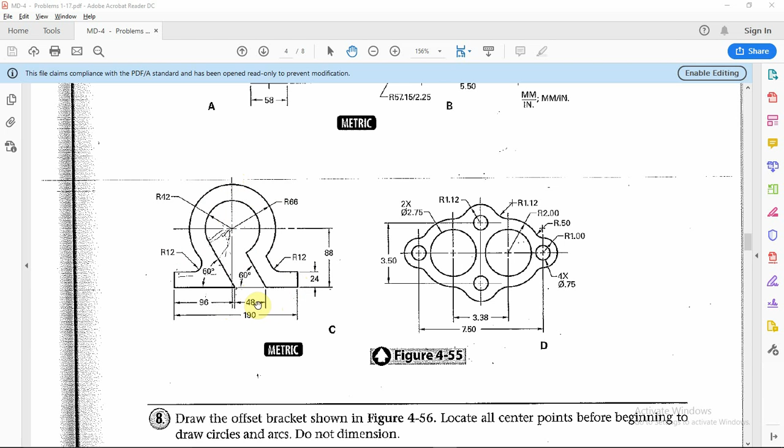So again, pay particular attention to this, and this video hopefully will shed a little bit of light if you are having some problems. Definitely some presumptions made.

This is a good example where geometric construction is what is used to accomplish this drawing. Question is which route you have to go.

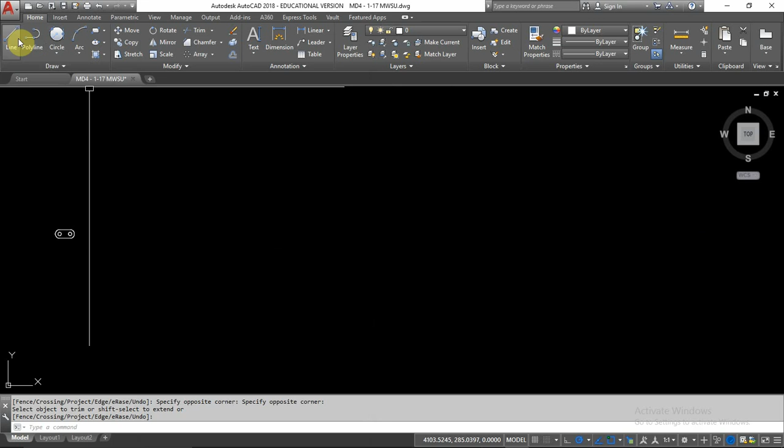Now I'm going to go ahead and start. I'm going to draw that bottom line, 190 millimeters long. This is metric, so 190. Okay, now that is the bottom.

Now I do know it's going to break somewhere here to the right of center, but I'm not going to worry about that point right now.

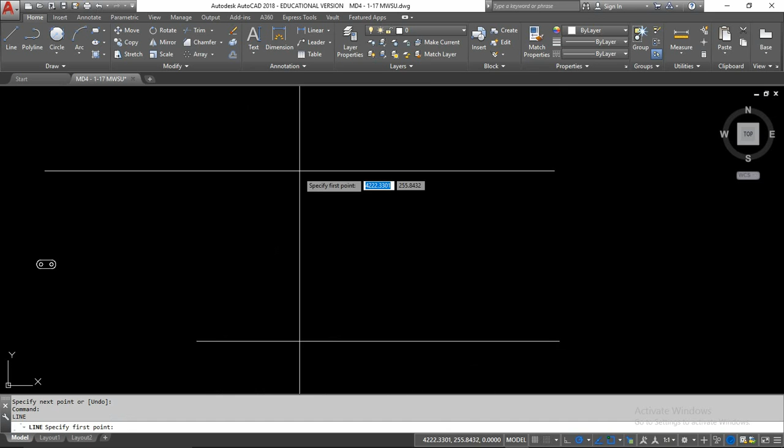Now another thing I do know is that it is 24 millimeters tall in this case, up and down the height, or it's not really the overall object, it's the fact that this part here is 24 millimeters thick. So 24. This one comes over, that appears to be a rectangular base, and to there.

Okay, so this is the base. Again, this is going to be modified, this line here definitely. This one will be also. But at this time, what do I know is true?

How do I get this big circle up here, either the outer one or inner one? I'm not going to draw it yet because I may accidentally think it's where it belongs, and then that'll mess me up. Think of it as a path.

I started with this corner right here, and so I'm going to use dimensions that relate to it, or to there. Besides the 190, there is also a 96. So in that case, I'm going to draw me another line.

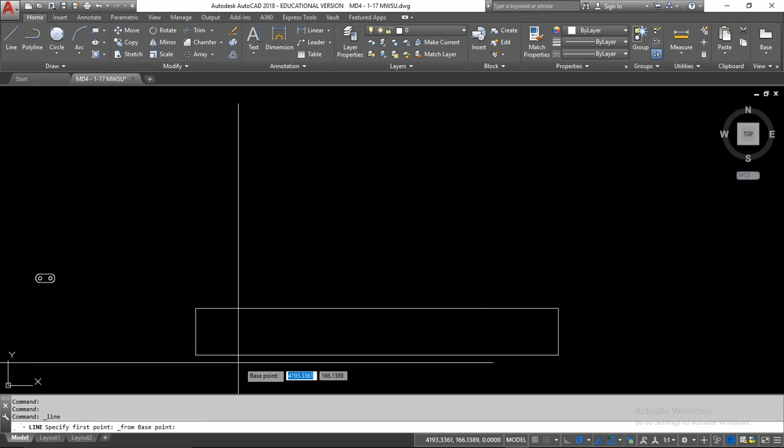Now I'll use the shift right-click from this endpoint, and it is a distance of 96 horizontally to the right to this point. Now there is not a line there. This is now the start of my line, and this line is going to come up this way.

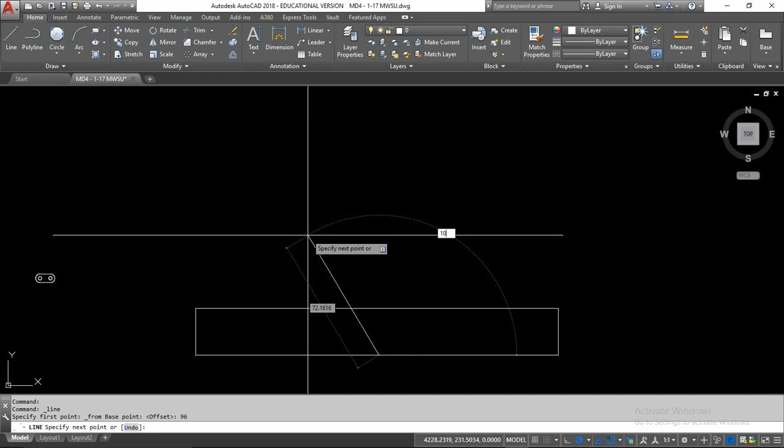What else do I know is true? Well, I know that it is 60 degrees from this horizontal on the left, above the left horizontal, 60 degrees. Well, per what I'm provided, I see that it is 120 being the supplement to it, supplementary angle.

Okay, now the length I just drew randomly. It might come up farther, I don't know. But at this time, that is all I need.

Also, from this point, there is another line, which is also 60 degrees, so it is parallel to this line. So I'm just going to copy it over a distance of 48.

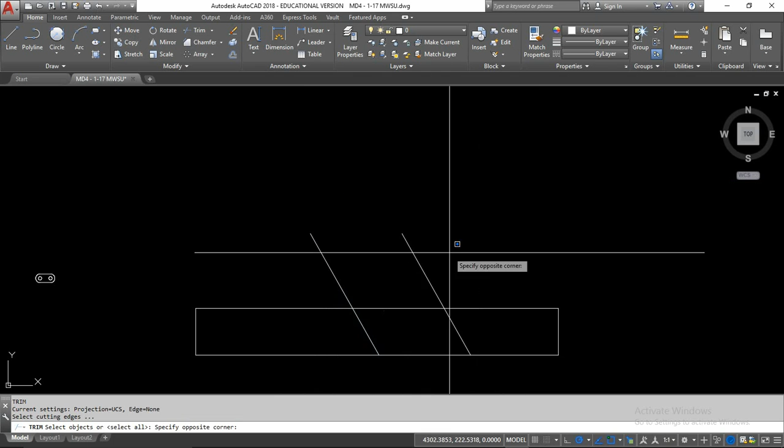Okay, now starting to take shape a little bit. If you want, and honestly I kind of recommend doing this, I'm going to go ahead and trim. Using those as my trimming objects, I'm going to trim both of those lines. Now this line won't go all the way over here, nor will this line come all the way, but I'll leave those for now. What else do I know is true next?

Now these lines, this one here is going to come up, and it's going to end up being tangent to a circle that is in here.

How do I get that? Well, let me go ahead and just draw a circle. I'll just draw it out here, and the radius of that one is 42.

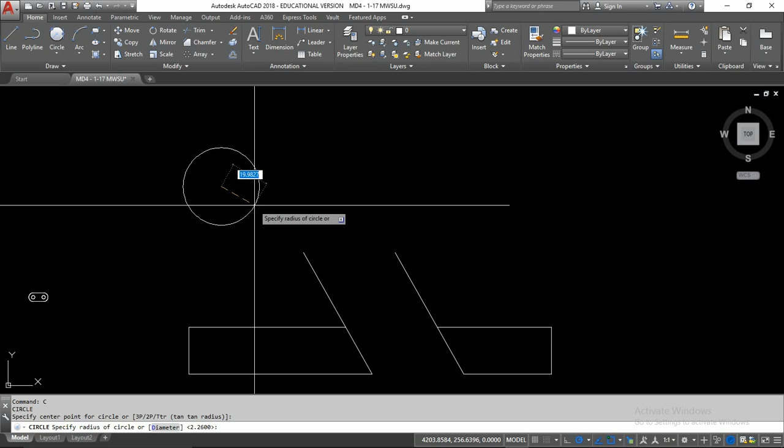I'm not going to draw that second one. This is the inner circle only. So I do know that somehow or another this circle is tangent to that line.

Another thing I know is that the center point is a distance of 88 up from this line. So in that case, I'm going to go ahead and draw from here up 88. This is a construction line. I'll end up deleting it.

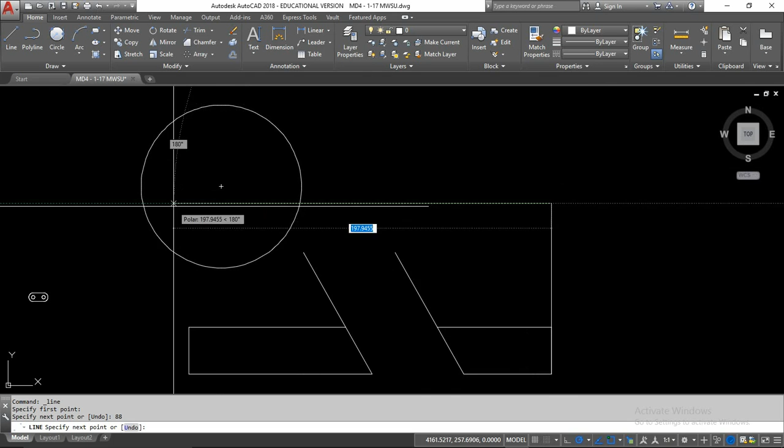And I'll draw over. Let's see, I'll just make sure it's right, so that way it stays symmetrical. I'll draw it that long. And this one I'm going to change color to say, hey, that is a center line.

And I'm going to put this circle on that line. Now, again, where is it? Well, there is only one other place, well, two other places. It could be here to where it's tangent. This line is tangent over here. That's not the case. So I know it needs to be over here somewhere where this line is tangent to there.

Now, you notice I clicked on the midpoint. I'm not absolutely certain that that is correct. It might be. It might look really close. If that's the case, I could do an EX, extend to here, and click.

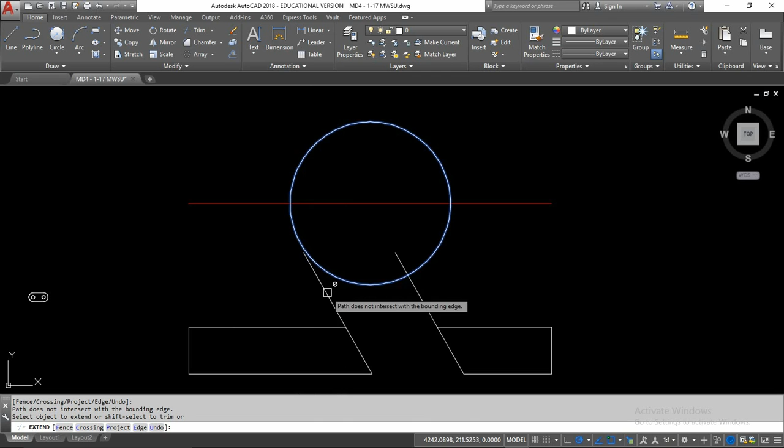Well, you notice it's saying no, can't do that. The reason for that is I said this is what I'm extending to. If this line is going to miss it to the left, then it's going to say, hey, this isn't going to work. Keep in mind, again, your drawing area, your graphics window is infinite in size.

You don't want this to extend infinitely. Your computer will be frozen up forever until it gets there. So that tells me that this is off a little bit.

Now I'm going to double click. I'm going to double check radius 42, and that is what it needs to be. So what's going on here?

What I'm going to do, I'm going to move this back again so that we don't make an assumption that we don't want to make. Actually, I'll go ahead and draw it up here also.

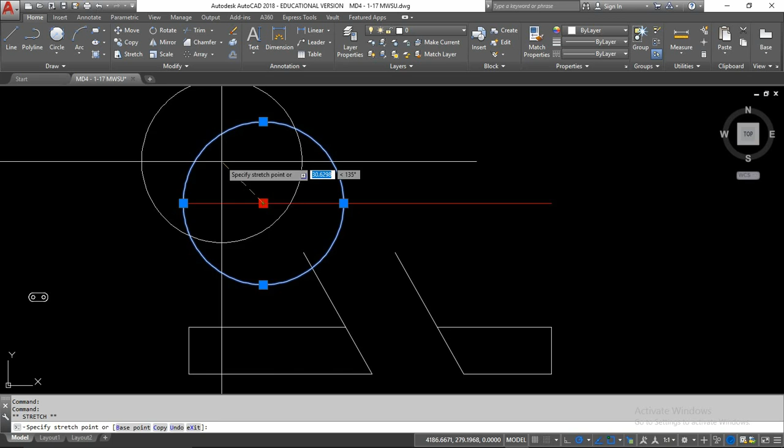So here is where knowledge about tangents can come into play and can be very beneficial. The fact that I know this circle needs to be tangent to that line there on the left. And when it is, I know that, now I'm just going to pick somewhere, and this is, I'm going to show that it's off.

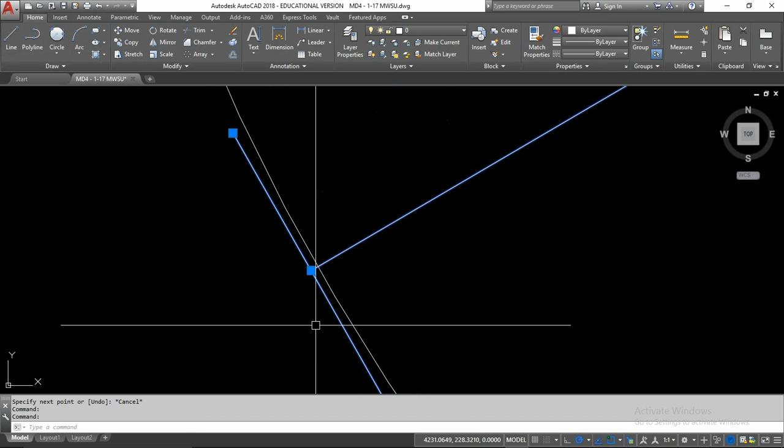I'm going to pretend that it's tangent there on the endpoint. If this is truly tangent, one thing I know is true is that the radius drawn to that point of tangency will be perpendicular to this line. Okay, so, and notice again, I'm just throwing that out there nice and quick. It's not accurate. I'm not intending for it to be.

Let me move those back. I did undo, Control Z. So what I'm going to do is, if I know this line that is perpendicular, the radius is perpendicular to it. If this is 60 degrees up from the left horizontal, a line perpendicular to it, well, here we go.

A line perpendicular at a distance, well, I'm not even going to do a distance. I'll just draw a large line, shift right click, perpendicular. Notice where it's going to select, right there.

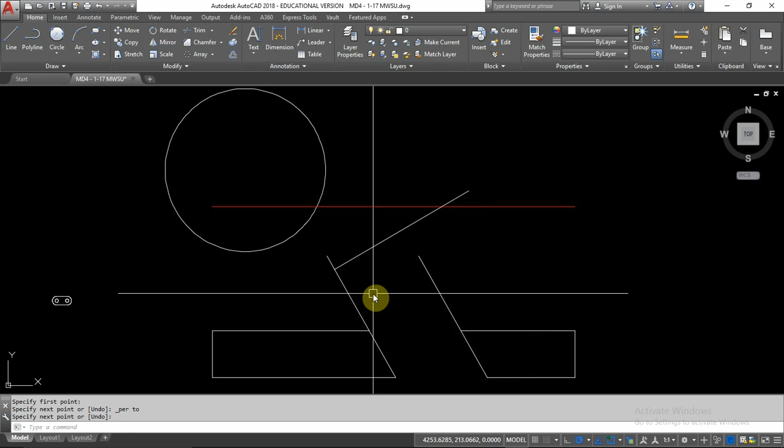Now I can draw, let me move this first so you're following along, which I don't know that the tangent point is at that endpoint. I have no clue. So I'm just going to draw a circle from here, that intersection, a radius of, drawing that radius backwards, 42.

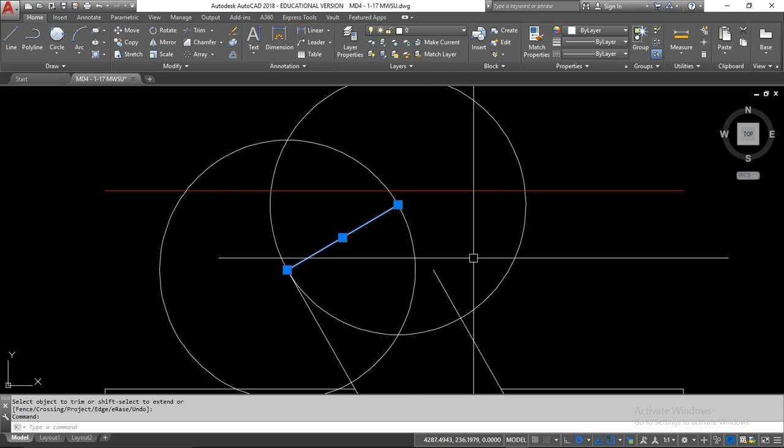This theoretically is where that line, that circle, needs to be centered. So if I move it from here to there, I now know, since this is the radius. Let me make sure you understand what's going on here. I've selected both the circle and that line, and they are exactly the same point.

Now here's where that line appears to be off. Okay, so I do know that this circle is now tangent to that line. This line, the radius, and that circle were construction lines in order to get to it, geometric construction. Now, the one problem is this is now off of my height.

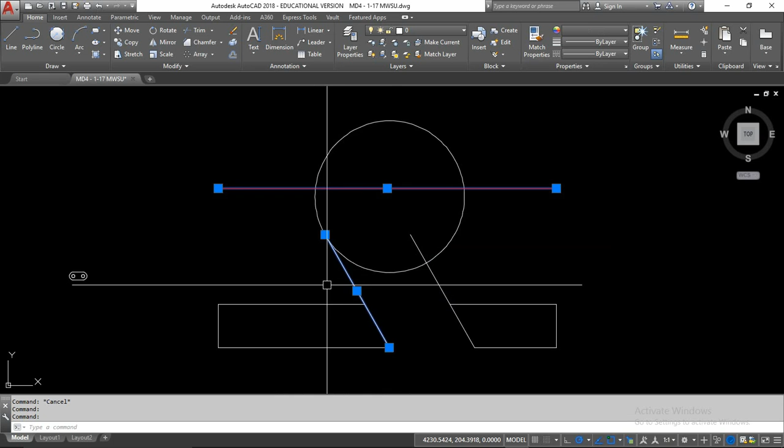This line here is where the center of this circle should be. So basically it just needs to move up. It needs to stretch upward at this same 60-degree angle up from the left horizontal until it intersects this line. So I'm going to draw a line from the center, and I'll just draw it here, tab 120, the supplement of 60.

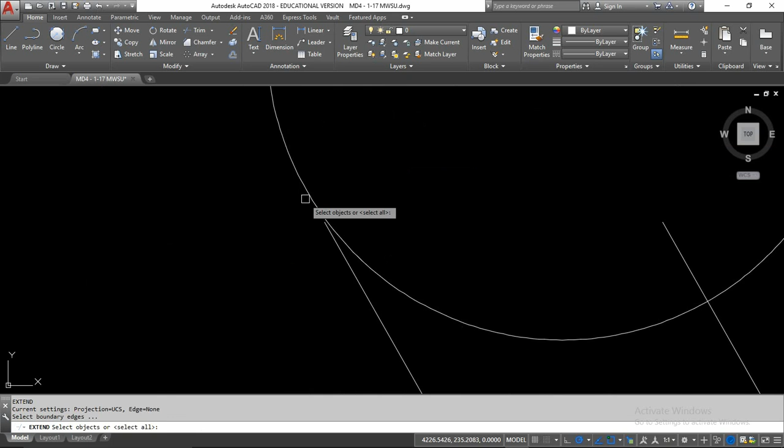Now I'm going to move this circle from that center to that center. Let me erase this. I can see that this line no longer intersects here, but if I extend to this circle, there it is. Now, I can go ahead and trim this, but just to double check, let's get rid of this line. Okay, and let's draw a line, shift right click from tangent, from here down to this point.

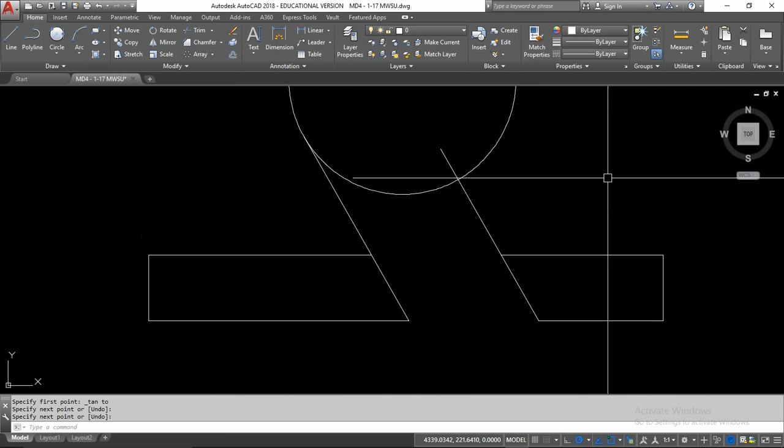Now double check it. If I want to measure angle line to line, it shows that it is 60 degrees. Now I haven't gotten into being able to show this more accurately as far as exact 60 degrees. This is rounded, by the way, but at this time, trust me, I do know that that is a perfect 60 degrees. So at this time, this circle is correct.

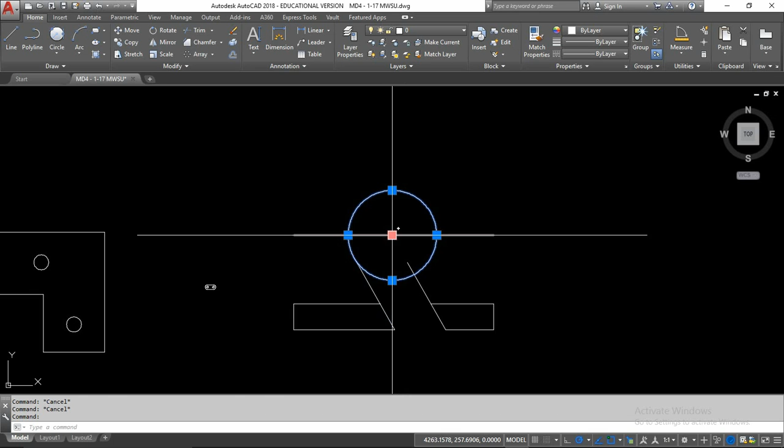It is tangent to this line being 60, starting from this point, 96 units over, and the height, the location of this circle is on that red line, a height of 88 millimeters up from this line here. So at this time, we are good.

Now, what do I know is next? I know there is another circle that is the same center as this one, and a radius of 66 units. I could have done the math. 66 minus 42 is 24, and I could have done an offset.

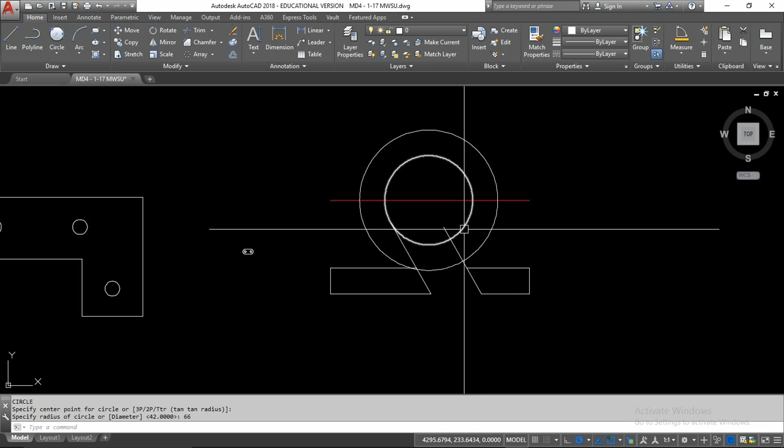By the way, these two lines, or the length of this line, is 24. There is that uniform thickness all the way across that I was talking about. Let's go ahead and clean it up a little bit. Let's trim. Okay, let's also trim this.

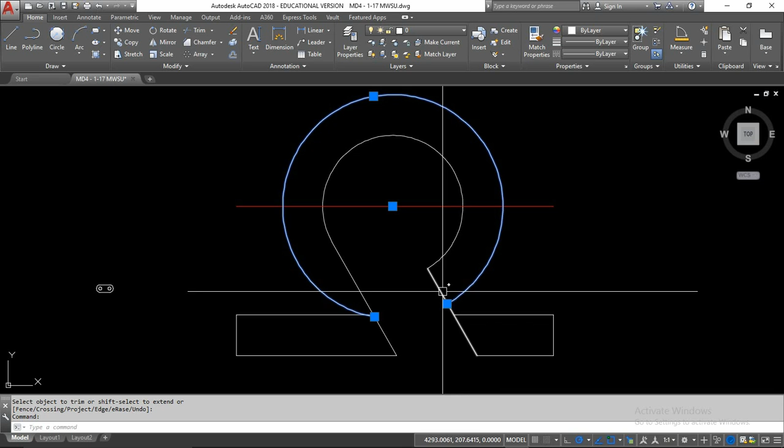Now again, this arc here won't come all the way to the line. This line here and this line here will not come all the way to this line. Let's go ahead and do what? Well, I said a uniform thickness. Here is that 24. What I haven't done is a uniform thickness of this angular piece here and this angular piece here. So let's do that via an offset.

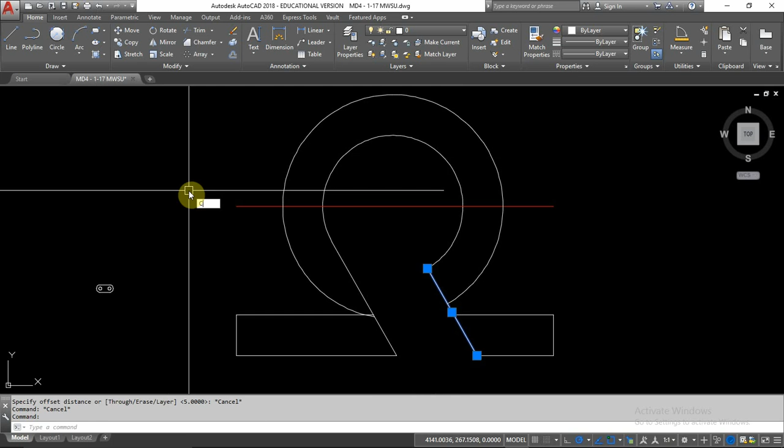This is a good example. To do a copy, exactly where, I'm not sure. I know it's 24. Well, 24 horizontally is not a thickness of 24. 24 vertical is not a thickness of 24. It has to be in a direction perpendicular to the line itself. So offset is really the best, quickest, almost the only option to use.

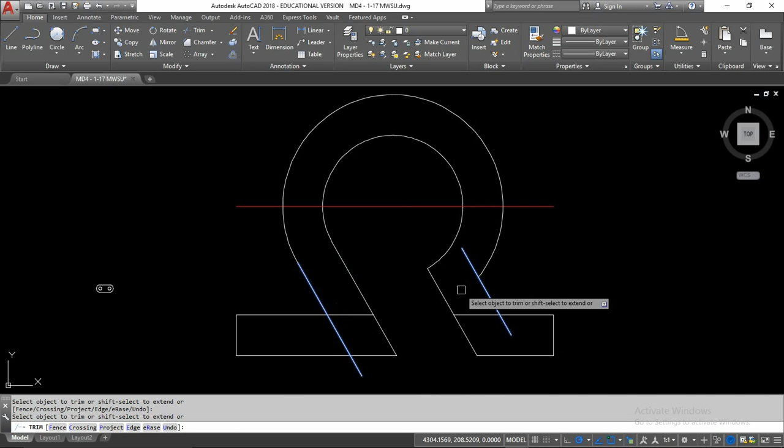And again, this one here. Okay. Now, just to clean things up so that you can see them a little bit better, let me trim some of the things, or some of the objects. Starting to take shape, yes? I hope so. I hope you see it.

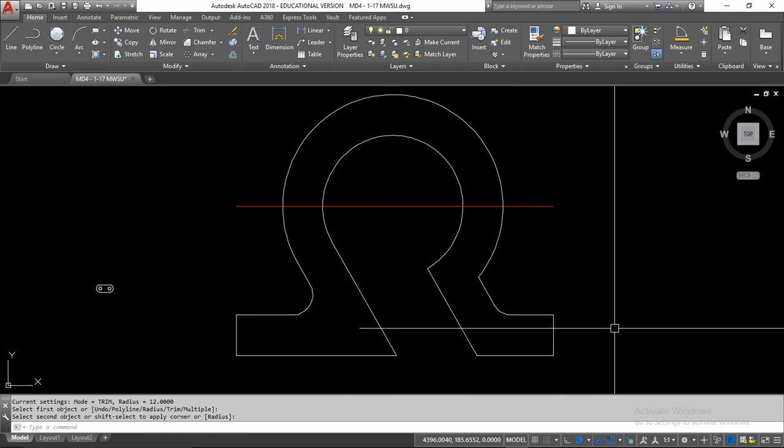Now, I have a fillet here and a fillet here, both being radius 12. So F, I need to change the radius to 12, and I go click, click, and click, click, and I believe I am good. Now, let me go ahead and show you, if I were to draw a line from the center of either of these.

Notice I do not come down on this corner. So again, the fact that there are two little extension lines, or an extension line next to a center line, that is important to see. You draw this thinking those are one line, or that the center of that circle is over 96. It will be wrong. It's not going to work out. So, okay, this one is done.